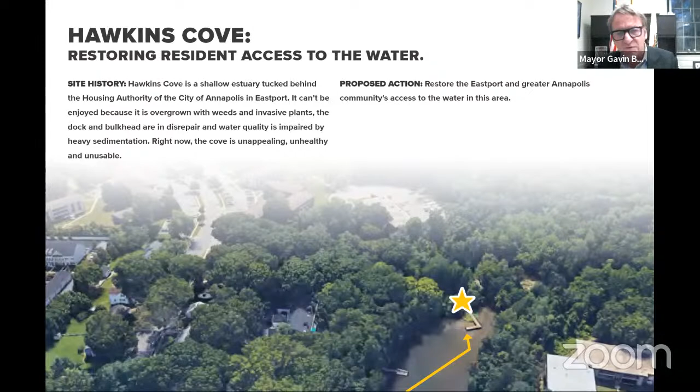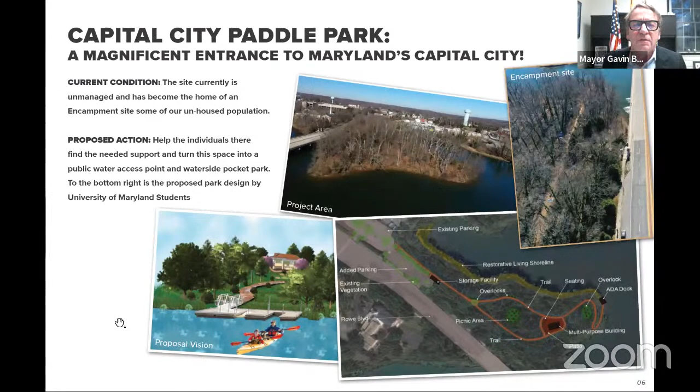We're going to put housing with water views and water access, and we also have another community on the other side of town on College Creek that we're going to do the same thing for, water access and water views. That is the community right there, on College Creek. I'm going to go through the slides because I've taken a little bit longer than I should.

So we know that the programming of this is going to be a game changer for this city. I know when I came into office, some people said there was nothing for my people or for certain people to do downtown, or did not feel welcomed. And I know I've seen all the work that you're doing. I know that it's a highest priority to create a city dock that is welcoming for everyone.

I'm so excited about the work that you've done, the work that we are doing. And I tell you that people that put that lens on their projects as we are doing are the ones that are going to be eligible for those dollars, so that we can make these improvements and create a beautiful waterfront park for the next generation and the historic gateway to the Chesapeake Bay.

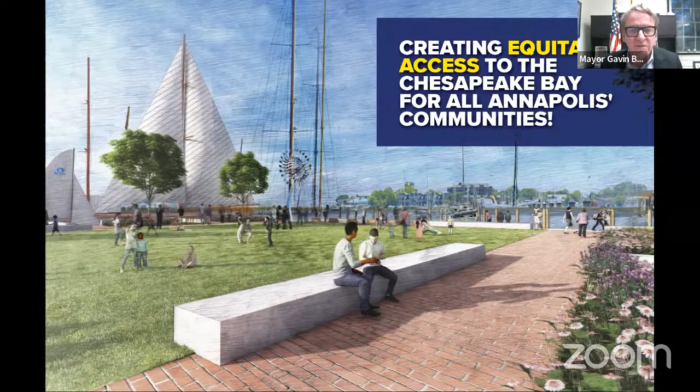It's amazing how using the work of the City Dock Action Committee, how it has really been the catalyst for so much else. I noticed that Alderwoman Finlayson has joined us. We want to say hello and welcome to her.

As you can all see, there's been a lot of progress on many fronts moving forward over the last several months. In terms of what we're going to share with you today, there's a design that takes everything the City Dock Action Committee developed and moves it to the next phase, an activated City Dock Park. Also, we talked a lot about the legacy of Annapolis, but the challenge has been how to weave that legacy into the park and the area around City Dock. We'll share that with you tonight.

And the garage, of course, the big message, as you know, is that it's on schedule. Next, the financial partnership has been extremely successful. The funds from the P3 partnership have been used for the major upfront costs for design and construction of the City Dock project. And with that, I'd like to have our finance director, who has really been the steady hand through all of this in terms of funding and financing.

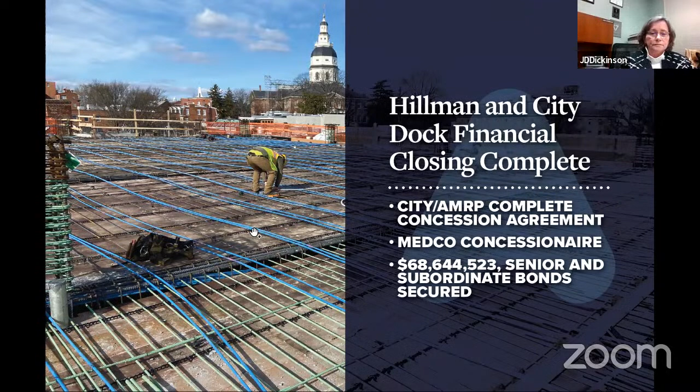So the next step in this process was, after we were going through this process of borrowing the funds and realizing the sub debt was going to be an expensive piece of debt, the AMRP partner had allowed us a one-time option, an early option within the first year during construction, to refinance that sub debt. And we took advantage of that pretty quickly. In December, we sold $21.8 million of bonds.

Some of that was a taxable piece, 8.3 million, and some of it, 13.5 million, was tax exempt. The first piece, I think I said, is that's taxable. The second piece was the tax exempt bonds, and those $13.5 million of tax exempt bonds are being used for the construction of City Dock. In doing this refinancing and paying off the initial sub debt that was issued by AMRP, we saved total dollars over 30 years of $34.7 million, and that's got a present value closer to $15 million in present value savings for this deal.

So it was a great advantage to do this refinancing quickly. To the right on the slide, you see some of the benefits. One of them is we were able to combine the refinancing with our annual bond sale, which allowed us to minimize our cost of issuance by combining the two issues.

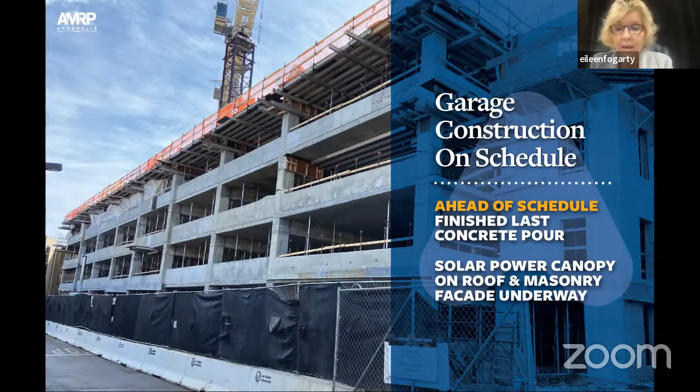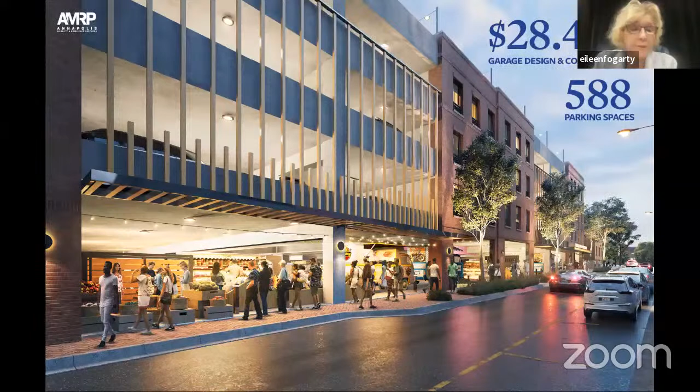And let's look at the last slide. This is the other direction, here we go. This is a $28.4 million project with all the design and the construction.

We are expecting, assuming no great unforeseen event takes place, supervening events, we are expecting to be open before July 4th, sometime in June. And it's just amazing and a tremendous job that's been done, not only by the contractors, Whiting Turner, the whole team, AMRP, but also great patience for the surrounding neighbors who have been patient and supportive.

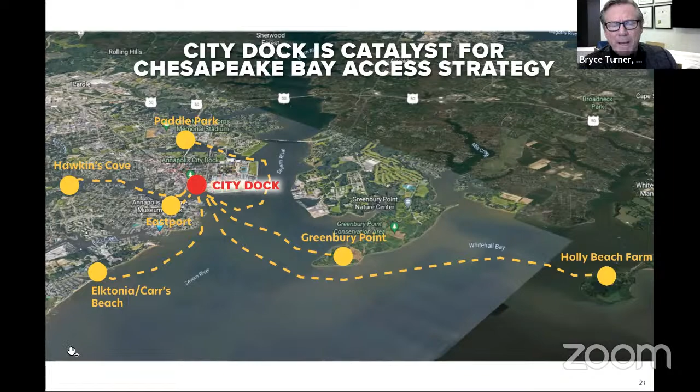This canvas has to incorporate so many different things: resiliency, cultural legacy, history. A lot of those things are beginning to inform the next steps we've taken. We're very fortunate to have Mahan Rykiel, a very talented landscape architecture and design and planning firm here in Maryland, working with us. We're going to show you some of that development in a few minutes.

We wanted to have Chris Haley talk to us about the Cultural and Legacy Committee that he is leading and some of the information that is helping to inform our design. Then we'll start to show you how it's been incorporated into the new park design. Hi, Chris? Thank you, Bryce.

Thank you very much. Part of what we really benefited from with the City Dock Legacy Committee is just the thoughts of who all should be included, which is the African American community, the Greek community, the persons who were part of our community as watermen, or people working from the stores and in all sorts of different occupations at the city dock area.

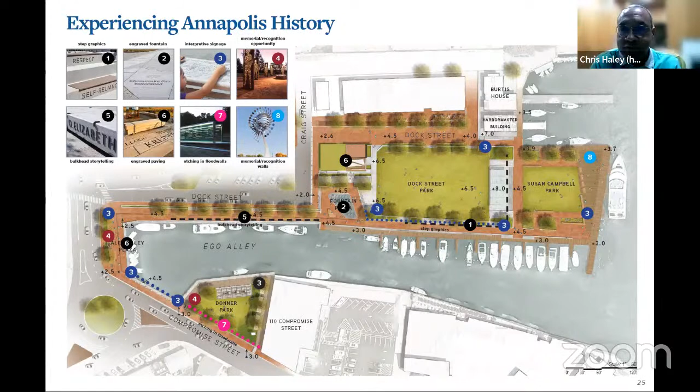Bryce? So we have a lot to build upon, and we have a lot to incorporate here, especially in terms of messaging and theme that we want to carry through.

So this version of the plan you're looking at, we've got some new things to share with you in just a few minutes. But of the things Chris mentioned, we want to think about how we tell that story at City Dock, all the way from Donner Park at the bottom here, all the way around to the new Dock Street Park and the Susan Campbell Park.

So we have certain infrastructure that we can work with to tell the story. One, in the very first image at the top left, you see how we can start to incorporate some messaging on steps. We're going to have a lot of changes of elevation here as we build up from the water's edge to elevation 8 for floodproofing and resiliency purposes. We're going to have a lot of horizontal surfaces, which we think could be very rich with maps, graphics, etc. We also have the opportunity for vertical artwork, and we're exploring how some of that can happen here at the dock.

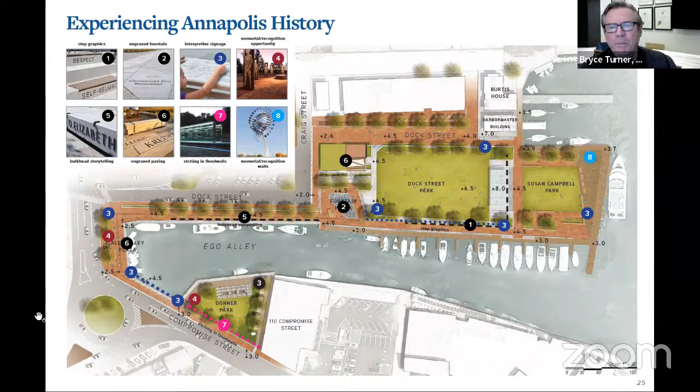On the next slide, we call this interpretive signage and messaging. I think everyone's probably seen in some modern landscape parks recently how that's been done very well, and Mahan Rykiel has done some great examples. So we now take this and start breaking it down further categorically.

Closest to Dock Street, we began thinking about where you can get an active park, and it seems to make the most sense at the edge of the city there that we start to have our most active components. Then we have the lawn, and we're making some modifications to it, but it will certainly be a place of respite, a little more casual, where you get closer and start to see more views of the water. It's going to be very exciting.

We think there's a great opportunity here for a fountain that we've always talked about. That area of the fountain can be combined with a pergola, where we might think a bit more about some of the people who have arrived at Annapolis City Dock, where they come from, and some of their backgrounds. Then the gateway at Susan Campbell Park, where you get closest to the water's edge, you can have a great view of the bay looking out through the Severn River and the creek. That should be a more forward-looking opportunity with sculpture and other artwork to help tell the story there.

So what I'd like to do now, with this framework in place, is ask Scott Rykiel to take us through some of the examples happening at each of these and unveil a new park design that we have for you.

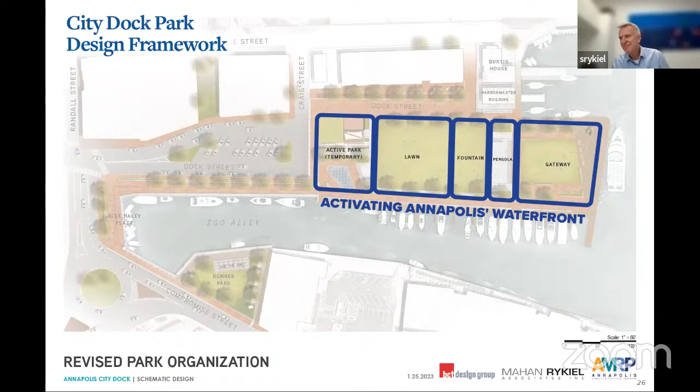Thanks, Bryce. So let's go to the next slide, please.

The active temporary area is temporary only in that everything there is movable. One of the things we have to design into the park is flexibility. We need to be able to put up the stage for the Singer-Songwriters Festival and accommodate the boat show. Since this is the first thing residents come to, we want it to include all of the things that will engage people, attract people, and connect back to the city. But all these things will be able to be moved.

Looking at the images below, you can see there's seating, landscaping, ping pong tables, seesaws, and swings. All these things, even the trees in the pots, can be moved. So this space really becomes the active space in the park as the first thing you come to. We see it as a place that attracts residents to come down, a gathering space.

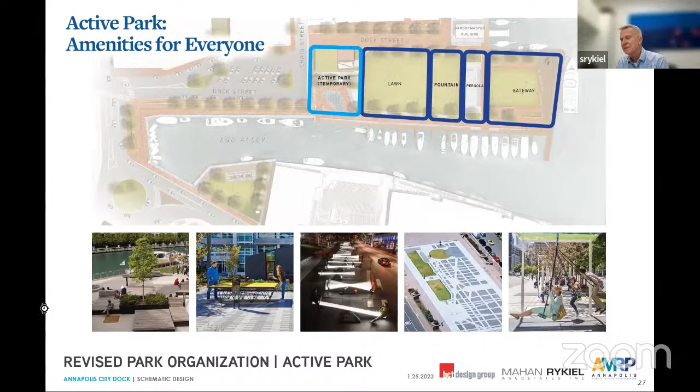Let's go to the next one. These are just some images showing the idea of perhaps putting plans of the city in the paving as a way to celebrate the legacy. Some examples of trees in movable pots and planters. These are all modular, and while they can look big, they're actually put together, and it's a great new element you can use in park situations that allows for that flexibility.

You can see more of the ping pong tables, and the Singer-Songwriter Festival stage, and how big it is. You can see the Capitol behind it, looking up Main Street, and what we need to accommodate. This works perfectly because we have the lawn behind it that's open, and that whole area we can open up.

Let's go to the next one. The lawn area is sort of the passive recreation space that provides green waterfront space for folks who may not have a waterfront lot and don't live on the waterfront. They have an opportunity here to come down, read a book, sit in the shade.

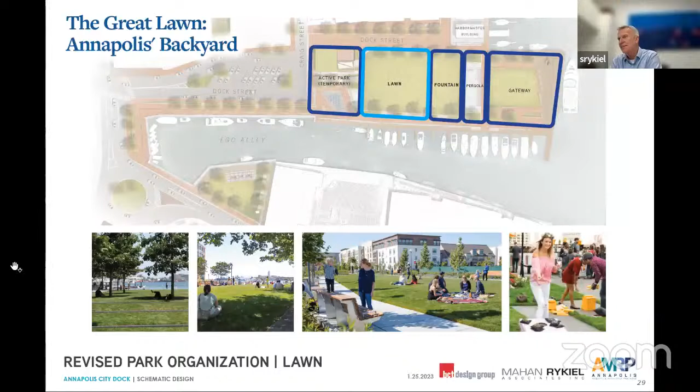So it's a place to read a book. It'll have movable furniture, probably some Adirondack type chairs, but you can also bring a blanket and picnic out there. We see that as another continuation of that active park. Let's go to the next one.

This shows some of the elements as we raise up for resiliency to get to elevation 8. It creates a lot of walls, as Bryce spoke about, which gives us opportunities to incorporate the legacy and celebrate the industriousness of the city dock and its history. These are just some examples of how we can do that, and it'll help us really energize those edges as we bring them up to elevation 8.

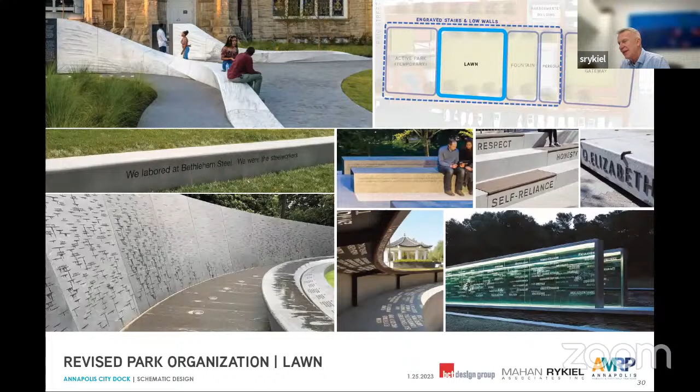Let's go to the next one.

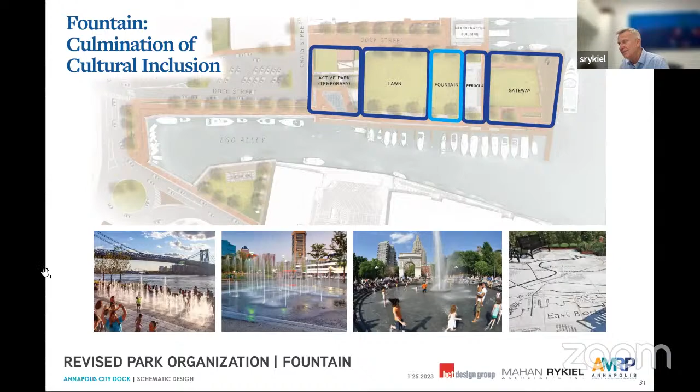It will be accessible, with a ramp down to it. Not unlike Washington Square in New York, it will have seating along all the edges, so parents can sit at the edges or at the top while kids play in it. We won't have a depth of water like that shown in the upper left, it'll be more like just a scrim.

We have that whole surface to animate and decide what sort of things can go at the bottom of the fountain. So when it's dry, it's a plaza. When it's turned off in the dead of winter, it will still have some interest.

Then the pergola, this is really a stage area, but on days when there's not anything going on, it becomes a place to sit under in the shade. You'll be right there next to the fountain. We'll have tables and chairs that'll be movable, and it becomes interactive.

We see a real opportunity to use the trusses and trellis structure to maybe recall some of the ships that came in and out of Annapolis, like schooners, skipjacks, the cargo ships that brought kidnapped Africans to the shores of Annapolis.

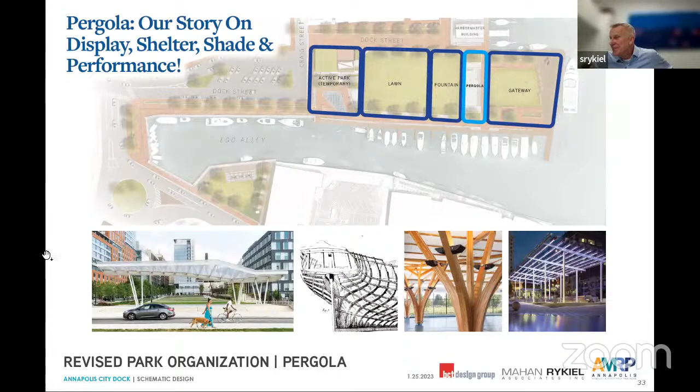Both views are great, right? That's the great thing about Annapolis, if you look back at the city it's an amazing view, and if you look out from the city it's an amazing view. So it's a rare opportunity.

This is just some of the ideas. You can see that when you look at the plans of ships, we can abstract some of those ideas into how that trellis structure could look, and also how dramatic it'll be at night when it's lit. It'll be this thing that you look out to the park, and it'll be pretty stunning.

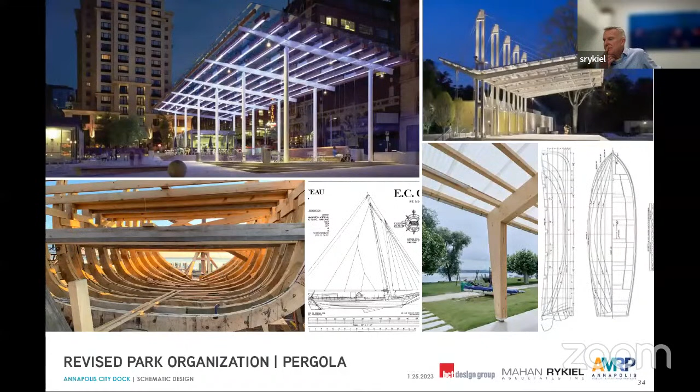Susan B. Campbell Park, really, we're seeing it as kind of the gateway to the bay. It's the first thing you see as you come in if you're sailing in, and it's the last thing you see if you're sailing out. We're really looking at this to celebrate the resiliency and sustainability of the future of the bay. We'll have bay landscapes there. It's also the launching area for the tourist ships, the tourist boats that pick up folks.

We see an opportunity in the upper right corner for a kinetic sculpture that would have something to do with the legacy of the industriousness or the history of the dock area. We also see it as a way to get down to the water, one of the places where we can actually lower the edge and get closer to the water. This area will actually be lower than the lawn and fountain area.

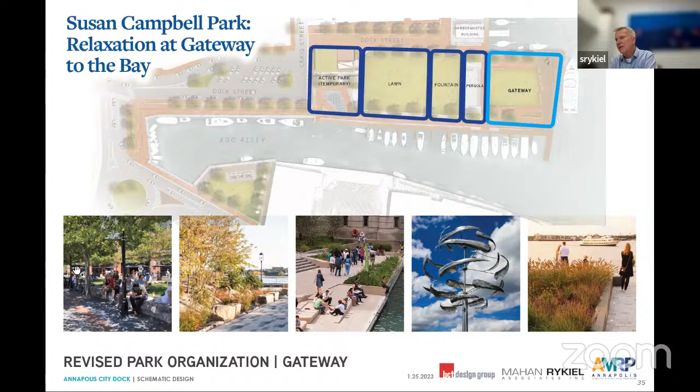These are just some ideas of that kinetic sculpture, when the wind goes through them. If you Google it and look at a video of these, they're pretty spectacular. There are lots of ways an artist could run with it and come up with something amazing, and again it will be an iconic element you'll see from the entire downtown area. On the right, you can also see the idea of getting down closer to the water.

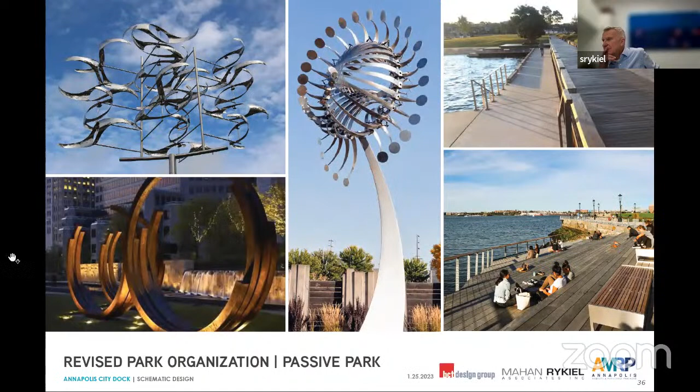So here's the new design as I've walked you through each of those spaces. Starting from left to right: the left is that activated park. We've got lots of trees in there, basically a grove, with swings to the south. We've got ping pong tables and lots of seating elements there. You step up about 2.5 feet to that area, and there are also ramps for ADA accessibility.

If you see the two sidewalks that intersect and ring the fountain, what's great is the way they circle around—they actually cross over and connect to the sidewalk at Craig and Dock Street, and they also connect you to the promenade. So it really brings you into the park and circles you around the fountain.

You can see the fountain there in the center, with steps down to it and a ramp to get down on the planned southern edge. You can see the pergola next to that. This area is all up at 6.5, and then there are seat walls at the edge that bring it up to 8.

And then Susan B. Campbell Park at the end, with landscapes on either side, another open lawn space, and a wider open deck area that allows people to congregate while waiting to get on and off tour boats. It also just allows you to engage the water—besides dinghy dock, it's the only place you can get down close to the water.

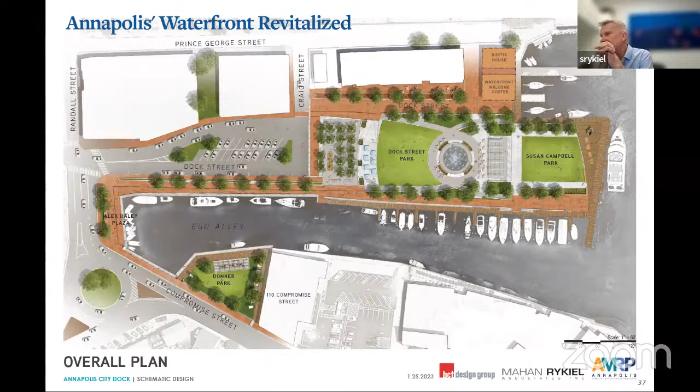So if we go to the next one—this is just a diagram showing the flood barriers we're proposing in the different areas. Without going through all of them, you can see we're employing several different types. Some are just walls that are always there, like some of our seat walls, shown in magenta.

The passive horizontal barriers are ones that flip up. Passive vertical barriers are literally a wall that's flush with the paving and rises as the water comes in—that's shown in yellow. And then we only have one area where we're showing a glass wall above a low brick wall, at Donner Park, so it'll maintain views through that area.

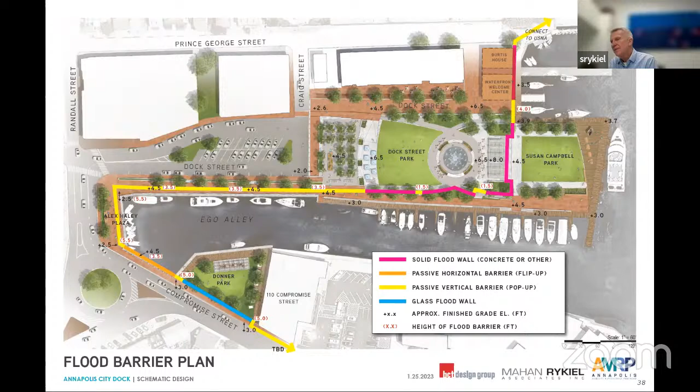So I think that concludes the presentation. Thanks so much, terrific job. And now we are looking forward to hearing everyone's comments, thoughts, ideas, and observations.

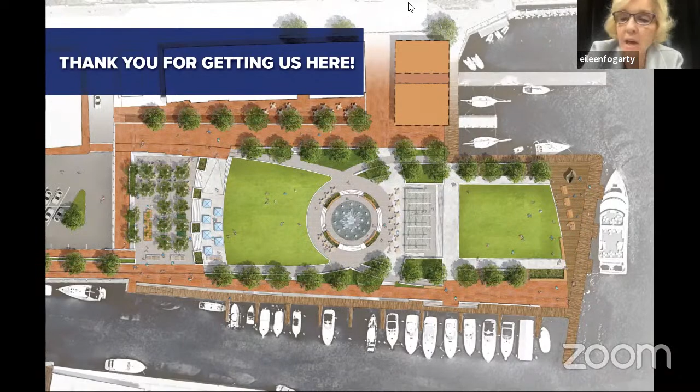You know, Eileen, while we're waiting for people to raise their hand, I just wanted to mention that we're so excited about this plan, with the circular fountain and some of the circular walkways that pass through there. Michael Dowling has been very active in our design committee, and when he saw an early sketch of this recently, it reminded him of the Nicholson plan for Annapolis, with our various circles and roundabouts. It makes a lot of sense and feels right there, I think, and we think so too.